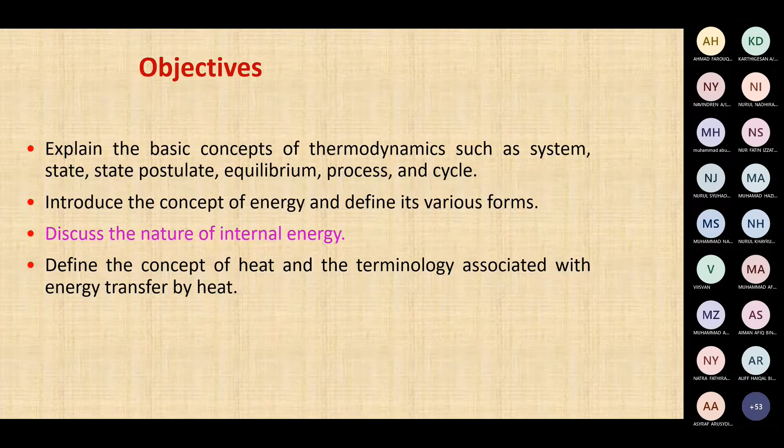The second is to introduce the concept of energy and define its various forms. The third, discuss the nature of internal energy. And the last is define the concept of heat and the terminology associated with energy transfer by heat.

Okay, now we go to thermodynamics and energy. Many terms are related to thermodynamics. I would like to introduce first the thermodynamics itself. Thermodynamics is the science of energy, so energy is the ability to cause change. The name thermodynamics stems from the Greek words therme as heat and dynamis as power.

The conservation of energy principle: during an interaction, energy can change from one form to another, but the total amount of energy remains constant. Energy cannot be created or destroyed. The first law of thermodynamics is an expression of the conservation of energy principle. Actually, the conservation of energy is related to the first law of thermodynamics, because energy cannot be created or destroyed. So the first law states that energy is a thermodynamic property.

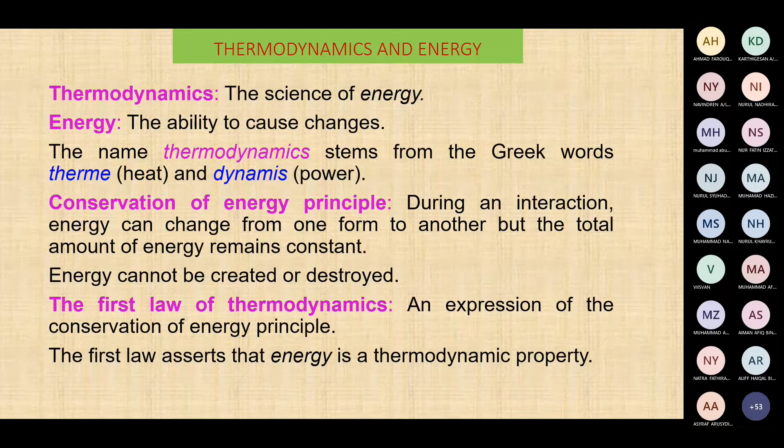Okay, after that we go to the second law of thermodynamics. It asserts that energy has quality as well as quantity. Actually, the second law of thermodynamics relates to efficiency. After we try to utilize some energy in our device, a certain device, then we try to calculate the efficiency. So this second law will relate to the efficiency.

Classical thermodynamics discusses the macroscopic approach. The study of thermodynamics doesn't require knowledge of the behavior of individual particles, so we don't go into the particle itself, just touch on the surface of thermodynamics, such as energy. So we only talk in general.

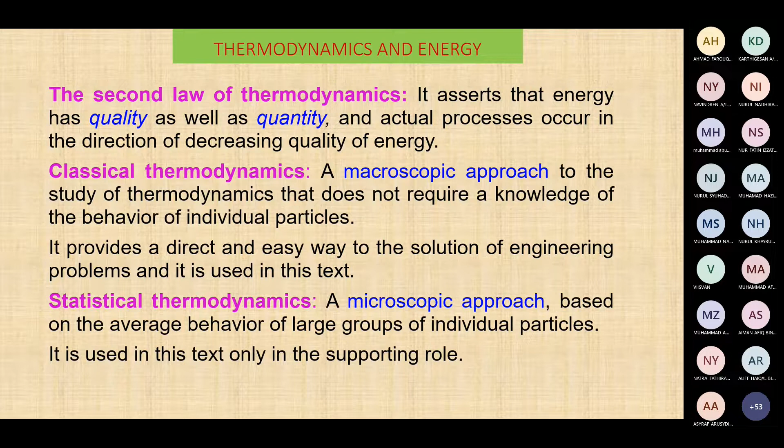When we go into a microscopic approach, it means we are in the statistical thermodynamics system. For example, we try to learn about internal energy. As we know, we have a kind of energy or fuel from the fuel. If you go to a commercial fuel petrol station, we will find RON 95, RON 97, RON 100. It means they bring different internal energy, from 95, 97 to 100. So this kind of energy is related to internal energy. Okay, now, forms of energy.

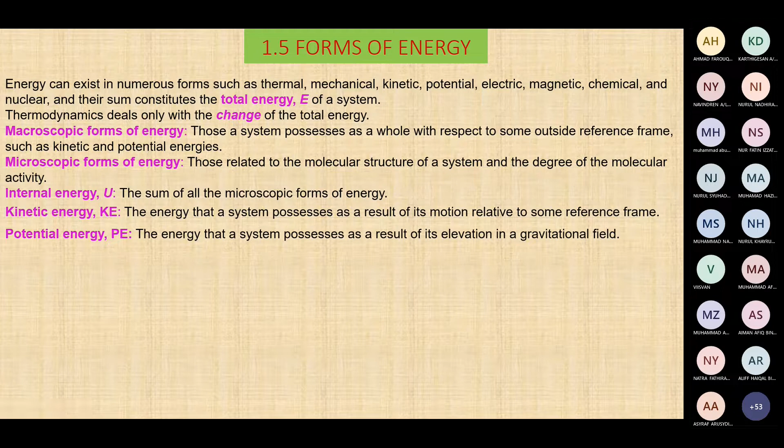We already touched on macroscopic, only on the surface of energy, and also microscopic form of energy. Internal energy is considered microscopic, kinetic energy is macroscopic, and potential energy is also macroscopic. So the total energy is the sum of them: internal energy, kinetic energy, and potential energy.

This sum equation comes from the energy form. So we check first the kinetic energy. Kinetic energy is related to motion, so we should have the velocity of the mass.

When we try to find the unit in energy only, we multiply by the mass. But when we need the energy per unit mass, the mass will be eliminated, so we put on that unit. When we multiply by the mass to the energy, we come to energy only. So both kinetic and potential energy can use this form of equation for energy without including the mass.

This type is for the energy form. When we go to other calculations in the system, piping system, tubing system, duct system, it will be related to the quantity of air, mass flow rate, and so on. Mass flow rate is calculated by m dot, and will be calculated by rho v dot.

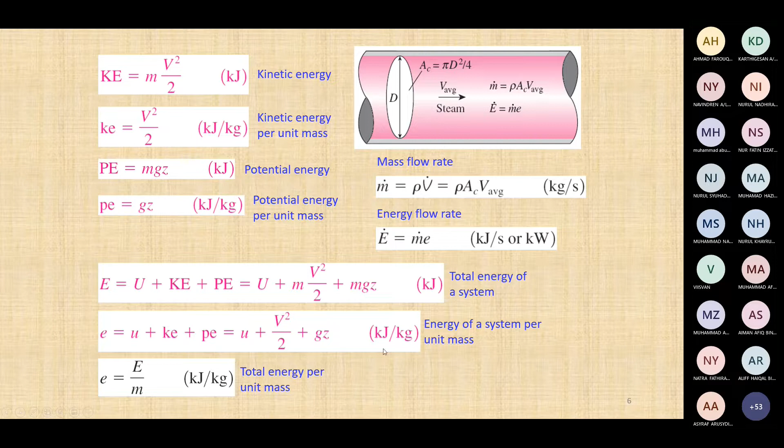This one is another type of energy, per unit mass. We can use small letters, but the unit is energy per mass.

This one is energy balancing. If in one system we try to input energy, the energy out should be similar to the energy in. This is what we call energy balance.

When we're talking about the balancing, E in minus E out is the energy work done in the system.

This one is the mechanism of energy transfer, E in and E out. The total energy may come out as another form of energy. So if we supply mechanical energy, it may come out as thermal energy, not only as kinetic or potential energy, but possibly as thermal energy.

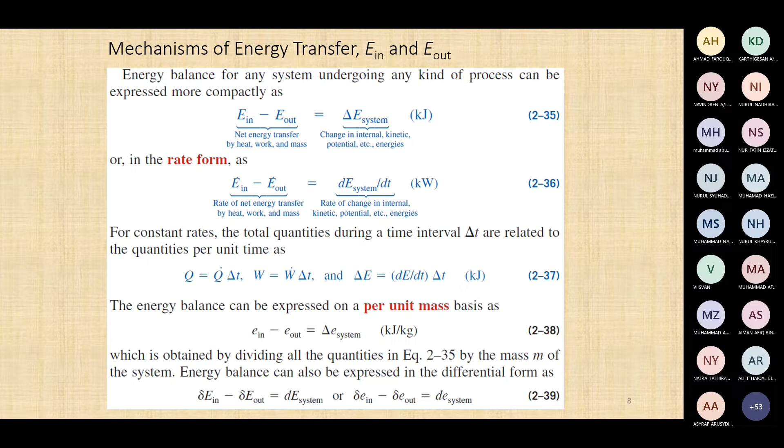This is balancing energy with variants of forms of energy. If we consider the total sum of energy involving thermal, mechanical, and another type of energy, E in and E out, the total is E system. The balancing is E system.

Now we go to another term that will be frequently used in the HVAC system.

This one comes from the thermodynamic system to explain certain conditions. In some cases, we may analyze one building as one system, or one room as one system.

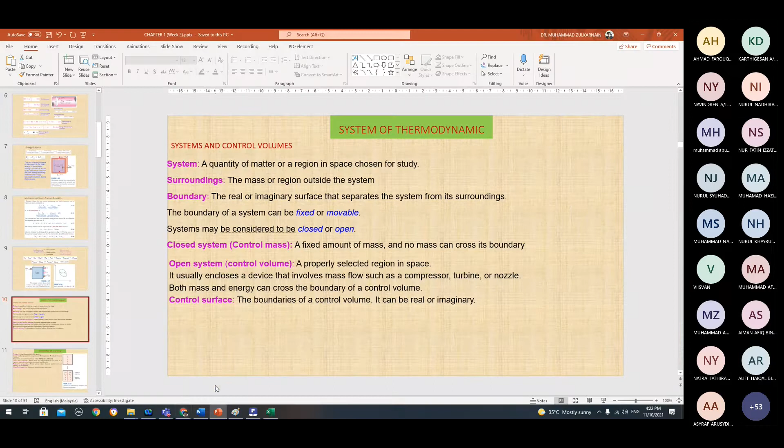This term will be taught under certain conditions. The system is a quantity of matter, a region in space chosen for study. So as I said, we will create one system that can be in the space, like one room or one building, considered as one system.

Outside of the system, we call the surrounding. Whatever is outside, like mass and energy, we call the surrounding. But separating the system and the surrounding, we call the boundary. So we will close with the boundary.

Boundary will be considered fixed or movable, closed or open, depending on the study case. A closed system is a fixed amount of mass and no mass can cross its boundary. So when the system is closed, no mass can cross to the outside surrounding. But open systems can do that, mass can come from the outside surrounding into the system, and vice versa from the system can cross to the surrounding. The control surface, the boundary of the control volume, can be real or imaginary.

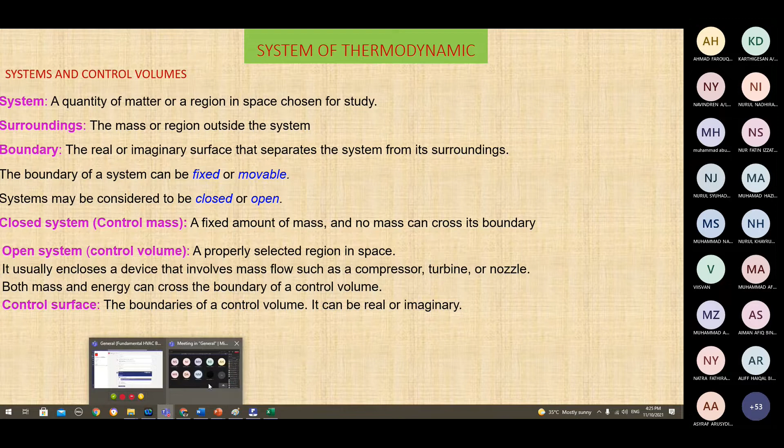But the condition is different. Inside the system, it's already at a certain pressure, temperature, and other properties, but there's no solid boundary.

Okay, we proceed to properties. These properties are familiar to us in the thermodynamic system, with properties like M as mass, V as volume, T as temperature, and so on until density rho. Property itself is any characteristic of a system. Some familiar properties are pressure P, temperature T, volume V, and mass M.

From the list of properties, we can divide them into extensive properties and intensive properties. Extensive properties can expand in size, so we consider mass as extensive, and volume also can expand, but temperature, pressure, and density cannot. We call these intensive, the opposite of extensive.

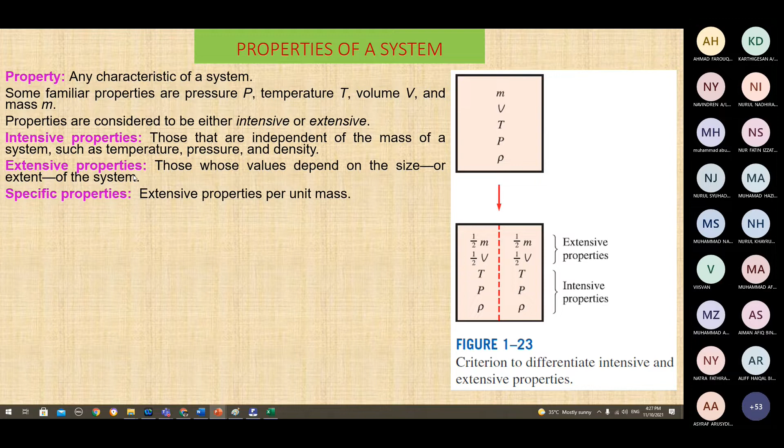This is another condition in the system, and this is fundamental before we go further. So why do we consider the system in equilibrium: thermal equilibrium, mechanical equilibrium, phase equilibrium. Much of this terminology comes from the thermodynamic system. For example, to explain the condition, the state is balanced, it means equilibrium, thermal equilibrium.

So what is thermal equilibrium? The temperature is the same throughout the entire system. So if we make an entire room at a certain temperature condition, it means the temperature at any corner, any position, any space will give the same information in the same temperature.

Phase equilibrium involves two phases, and when the mass of each phase reaches the equilibrium level, it stays there. So phase equilibrium means if we consider it in liquid, it will be consistent in that liquid condition always. And chemical equilibrium means the molecule content will be similar, like water always being H2O, so it means chemical equilibrium is still there.

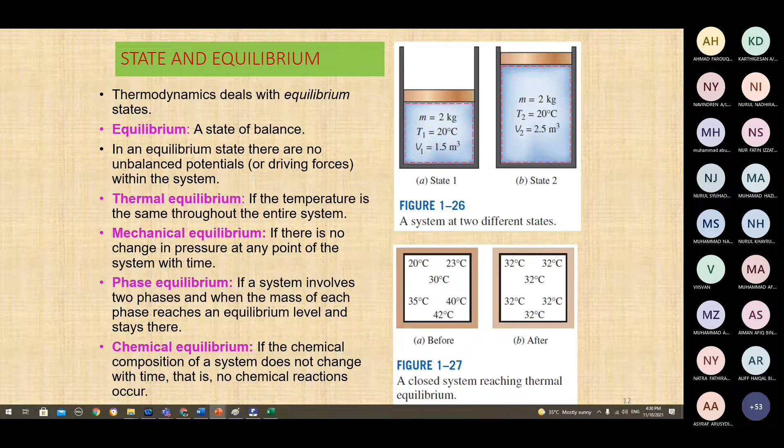If we change it to gas, it means it's no longer H2O, it has already changed, maybe already creating a gas with another kind of molecule.

In the ideal gas, we will touch the equation PV equal MRT. Actually, this form of the equation can be changed, can be accurate with other forms of the equation. V actually will be represented by two conditions. V is not always volume. When we mention V with a capital letter, it means volume, but v in small letter means specific volume. This is different, also different units.

Actually, v for specific volume is per rho. Rho refers to density of the mass. So if we consider small v as per rho, we will change the condition of the equation in the ideal gas. So no more PV equal to MRT, we can rewrite it in another form of the equation like P equal rho RT.

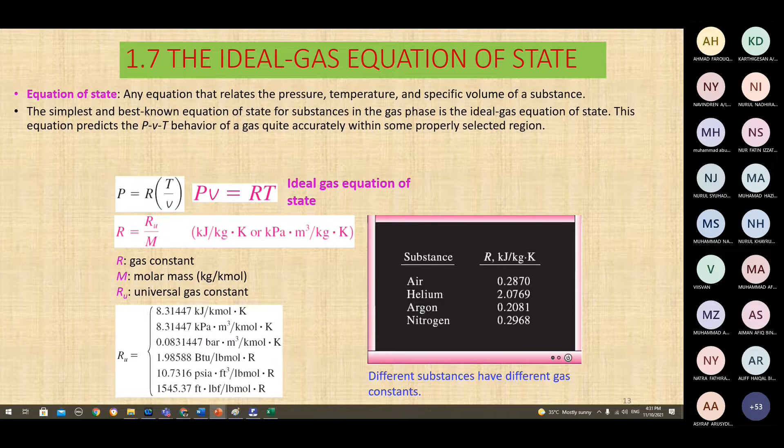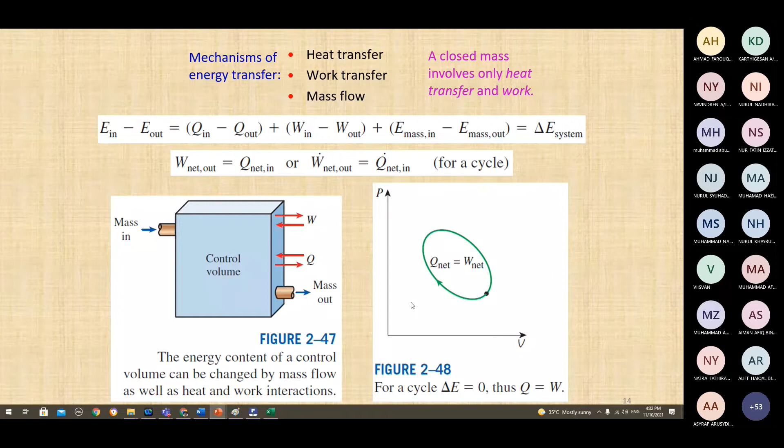Okay, this one is similar condition with the balancing mass. Mass in is equal to mass out. So whatever we supply to the system, for example air supply into the building or room from the AC system, so for the inlet, as the return of air, mass will be similar to the air supply into that room. This is similar to the equilibrium of energy. So the mass also will be similar with whatever supply to the mass, number of quantity of mass in the system will be returned by similar number quantity of the air to return.

Okay, this one is another form from the ideal gas equation, PV equals MRT. Now the mass where we carry it out, come out with M as a mass. So the formula we change like this. So when the system in certain condition, P1V1 over T1 equal to P2V2 per T2. This means M1 and M2, so M1 will be equal M2. Sometimes maybe P1 is lower, but this will be balanced by P2 is higher, but temperature is lower or higher also, and then V2 is maybe different, but the total will be similar to total in condition 1.

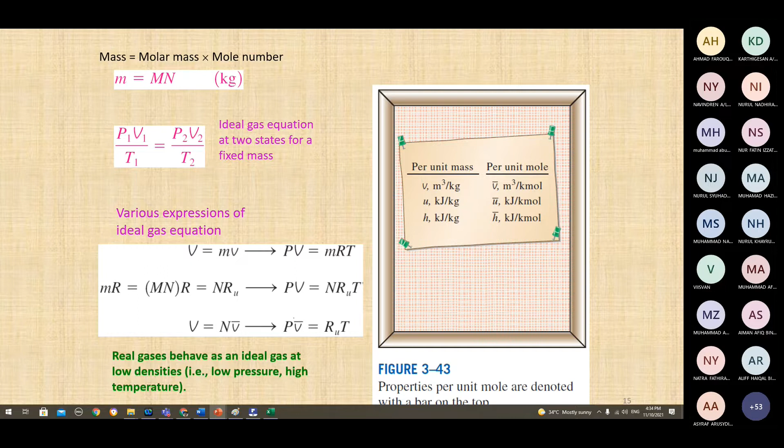Okay, this one is another form of the ideal gas equation. So R mentioned to the gas constant. So if we consider outside air, like the environment air, the air will get a constant number. So we can get this number from the table.

Okay, this one we go to sensible and latent heat. So this will be common use in terms of HVAC system. So we will use latent heat of fusion, latent heat of evaporation. What condition actually is it? So this one is to describe the condition of refrigeration system.

So actually, refrigeration system will change from the phase condition in liquid and then change to gas, vapor, and then what energy to change, the quantity, what quantity of energy needed to change to other phase, from one phase condition to other phase, from liquid to other kind of phase like vapor or gas. So why does this happen? Because we need refrigerant in that condition of phase to supply the kind of energy. So the energy we will supply to the environment, what kind of energy, and then what kind of phase, and then to the indoor room itself, inside of the room, what kind of phase, and how much energy.

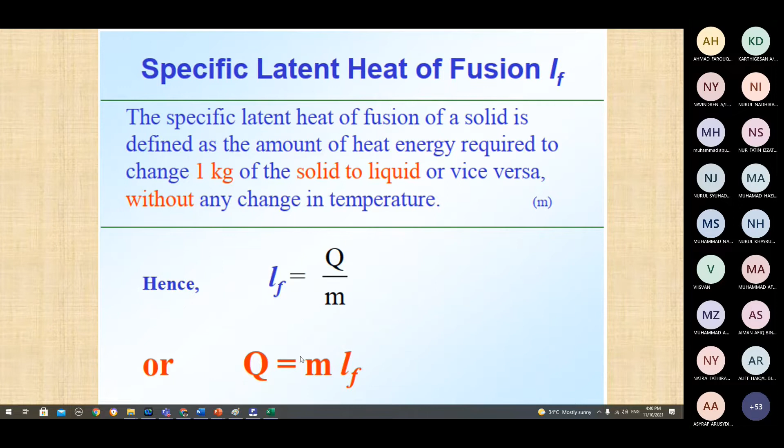The specific latent heat of fusion of solid is defined as the amount of heat energy required to change 1 kilogram from solid to liquid or vice versa without any change in temperature. Hence the formula LF equal to Q/M, or we can rewrite to find Q, which equals M times LF.

This one is the formula for vaporization, latent heat of vaporization, LV. The specific latent heat of vaporization of liquid is defined as the amount of heat energy required to change 1 kilogram of liquid to vapor or vice versa.

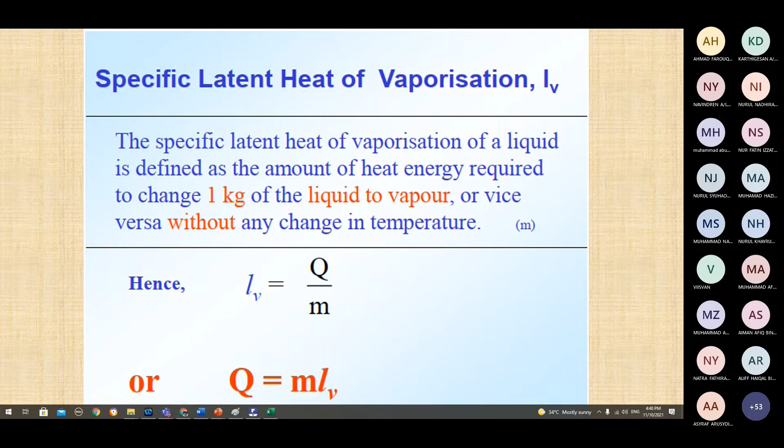Solid to liquid: this is the energy in the water system, from ice to liquid. Energy is needed to move molecules slightly further apart so that the attraction between the molecules is weaker. So what I said just now, we remove the bonding within the molecule, and it becomes water. As we know, in the solid the molecules are bonded to each other in a good arrangement.

So when we weaken the bonding and it becomes liquid, now the molecules can roll and slide after we change the phase. So the molecules now become moving from one molecule to another, with no more bonding to each other.

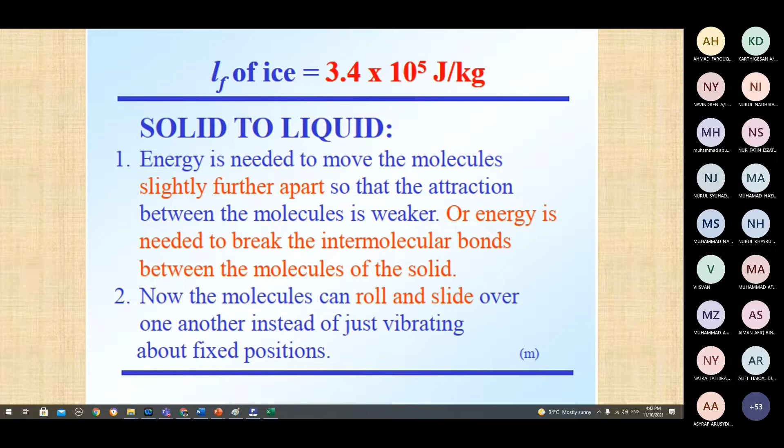Liquid to gas: energy is needed to separate the molecules against the mutual attraction. This is the higher bonding within the molecule, the attraction within them, and we try to separate them. For example, H2O, we try to remove H2O to become H itself and O itself.

This requires a higher amount of energy. This is why LV is larger. Yes, correct.

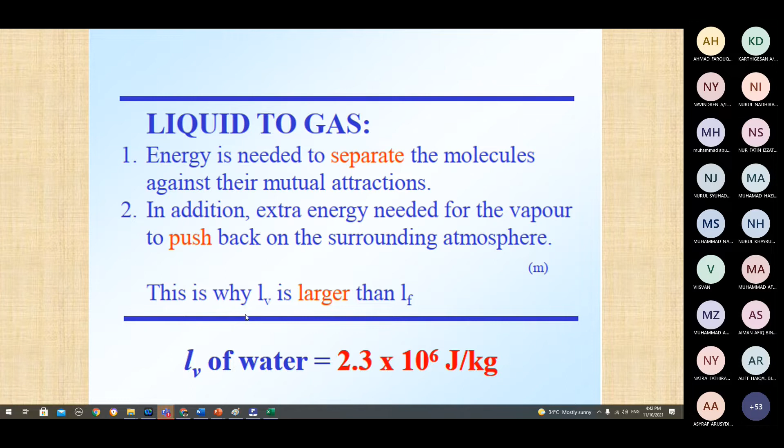Okay, we go to saturation condition. So actually when we plot P as pressure and T as temperature, or we can plot P with the specific volume, we get a diagram like this.

So this left part is actually the saturated liquid of water, and for the right side of the saturated curve, it forms the saturated vapor condition.

Within the region from saturated liquid to saturated vapor, there will be a mixed condition, depending on the mixture condition. Sometimes when we go close to the saturated liquid line here, maybe the liquid portion is dominated. When we go to the other side, close to here, the mixture condition is dominated by vapor condition.

Maybe 50% is exactly symmetric between the saturated liquid line and the saturated vapor line, so it will be around here, giving 50% condition of mixture.

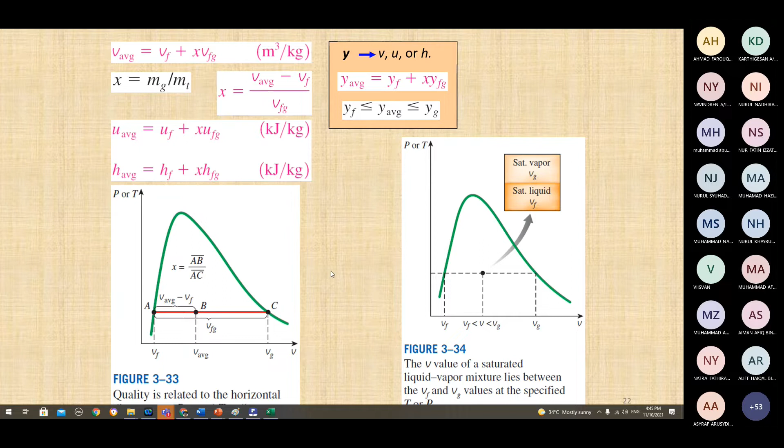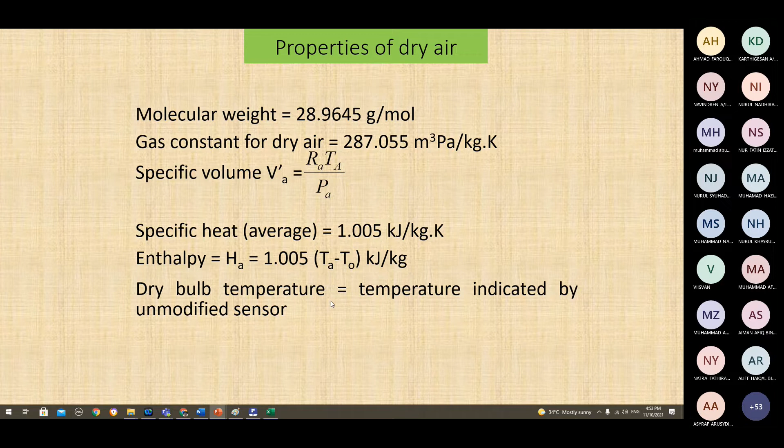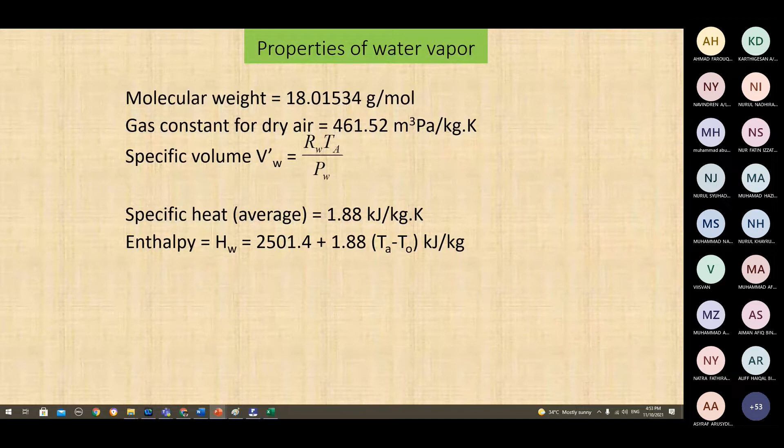And then this condition of properties when the condition is water in vapor. And then this equation for air and vapor mixture condition, we can use Gibbs-Dalton law. So the total is air, dry air with the wet air, or mixed condition.

And then we go to the condition of dew point temperature. As we know, we try to condition the air with HVAC system devices. So anything will be related to air and water condition, because air is related to water condition. And sometimes we also use refrigerant in some HVAC devices with water, not only refrigerant of the chemical kind. So that's why we try to create more understanding of the water and air system.

So the dew point temperature is when the water vapor in the air becomes saturated. When air is at the temperature equal to the saturation temperature corresponding to the partial pressure exerted by water vapor, this temperature is called dew point temperature. So at the dew point condition, the saturation pressure is mentioned in that area of condition, pressure saturated with the content of water. When it touches a solid medium, it becomes condensation.

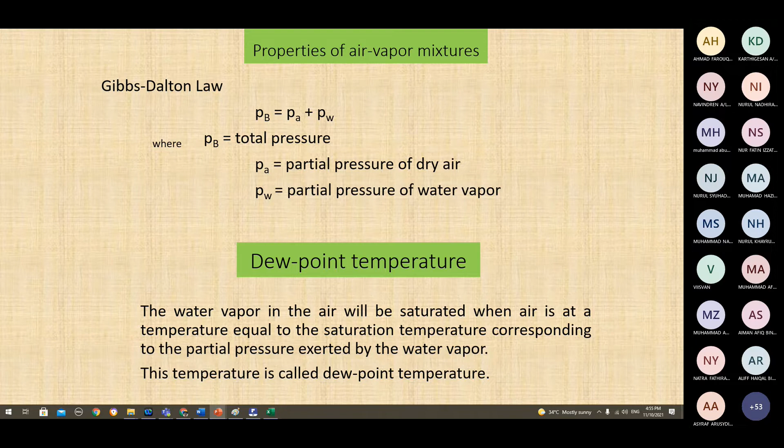Humidity ratio. This condition describes the condition of the space. That's why we try to learn what the condition is right now, and what condition we try to achieve, in terms of temperature, pressure, and moisturization system. So we try to measure certain conditions of the space related to the air and water condition system, because it relates to the controlling system of the space.

So humidity ratio is the ratio of weight of the moisture to the weight of the dry air in the air-vapor mixture. We try to describe the condition of the space: how about the condition in this space, how about condition in our room, how about the condition right now we want to control. So we will measure certain parameters - sometimes with humidity ratio, sometimes with temperature, sometimes with relative humidity. So we use this relationship to control the room.

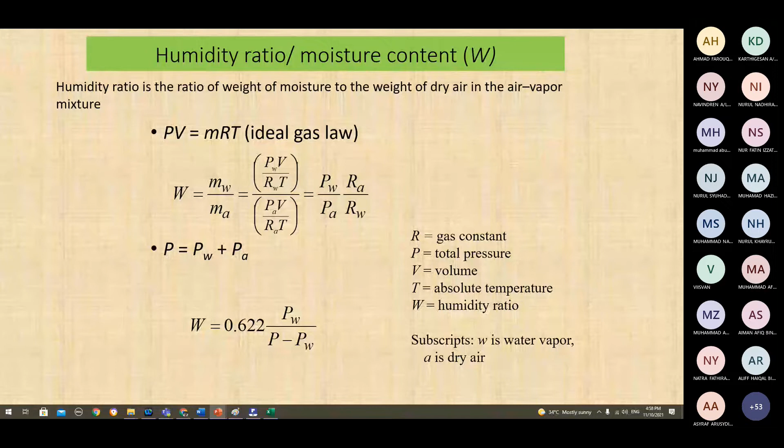So this one we can use the final formula for humidity ratio. This one is the relative humidity equation.

Relative humidity is the humidity ratio of the air expressed as a percent of the total saturation point for that specific temperature. So relative humidity is also used to measure this parameter, to measure conditions related to human comfort.

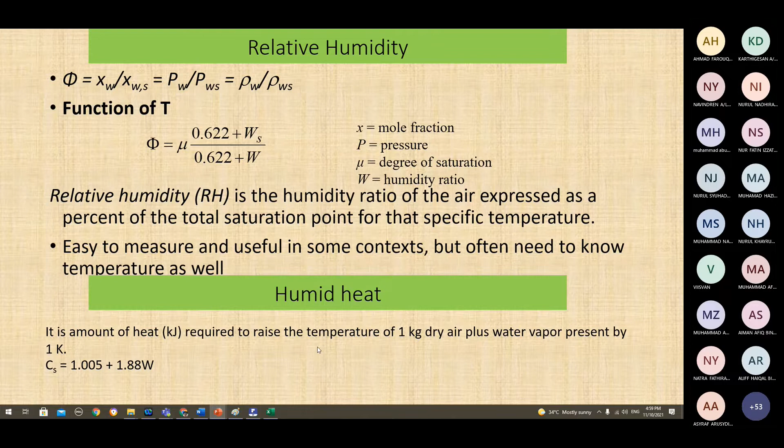This one is the formula. Humid heat is the amount of heat required to raise the temperature of 1 kilogram of dry air plus water vapor present by 1 K. Specific volume of the dry air plus water vapor in the air.

So sometimes we also measure, in a certain condition of the air, the specific volume. Maybe later on I will show how it relates to the condition of the air by using a graphic.

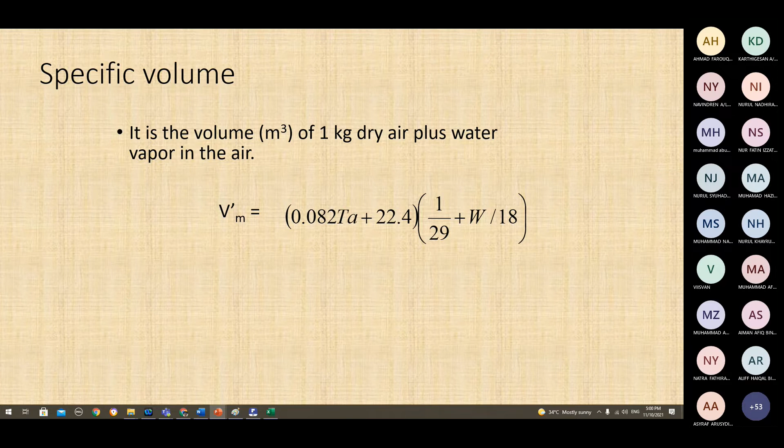We try to understand first the terms that we measure to condition a certain condition of the room, of the space. So we also measure the wet bulb temperature.

Actually, the wet bulb is commonly used in room temperature measurement. The wet bulb temperature is the temperature read by the thermometer covered in a wet sock cloth, the wet bulb thermometer, over which air is passed.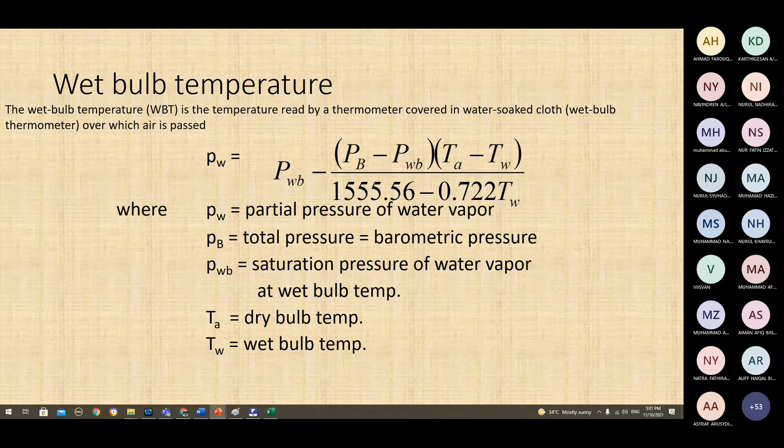Now, actually, all of the parameters that we are measuring refer to one graph. This graph, we call what? Psychrometric chart. Psychrometric chart.

So we find dew point temperature, humidity ratio, humid volume, and relative humidity of air having a dry bulb temperature. So we have input from the space: temperature 40 degrees Celsius and wet bulb temperature 30 degrees Celsius. So when we measure the room, we go to the psychrometric chart.

So we come out with several pieces of information from here. Certainly this is very sensitive, because we check with the eye only, so the skill comes from the eye. So if you make a mistake with your eyes, you will get an inaccurate result for a certain condition parameter measurement.

For example, this one with the curving line is RH, relative humidity. And then you can see here, horizontal line, mentioning the humidity ratio here.

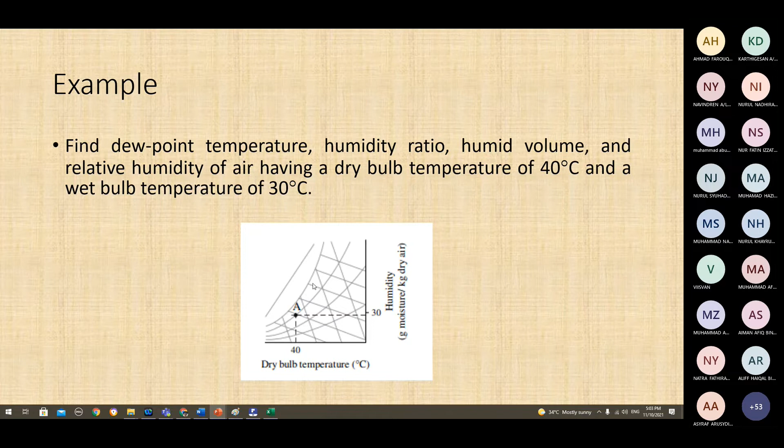Like this is RH, relative humidity, with curving, and then anything will give information. So we can check here, in the 30. This one is the temperature.

This number is not mentioned, but we can get the temperature for dry bulb. Okay, we can see here, but...

This one, humidity, moisture, is kilogram per kilogram. If you change it to grams, you get a bigger number. We try to get it in grams. This one is in kilograms.

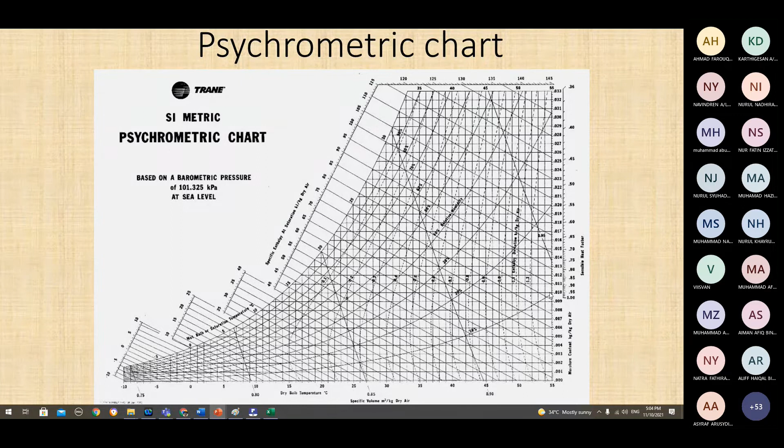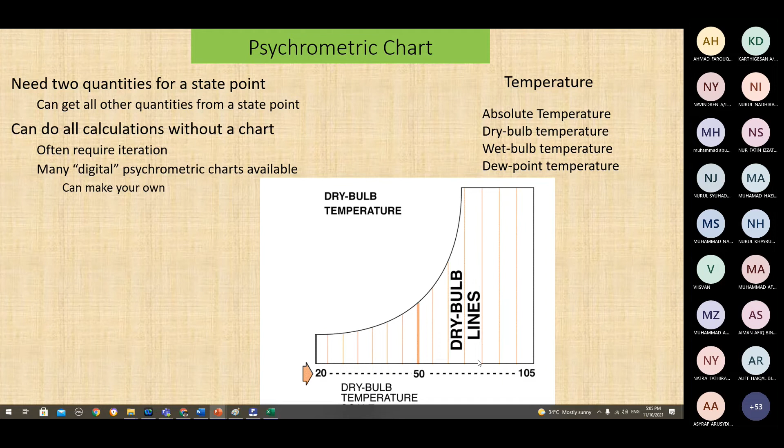Okay, this is just to introduce how to use the psychrometric charts. So we will come out with the dry bulb as a vertical line, and also wet bulb at a certain angle, maybe 45 degrees or something, and the relative humidity with curving, and dew point here.

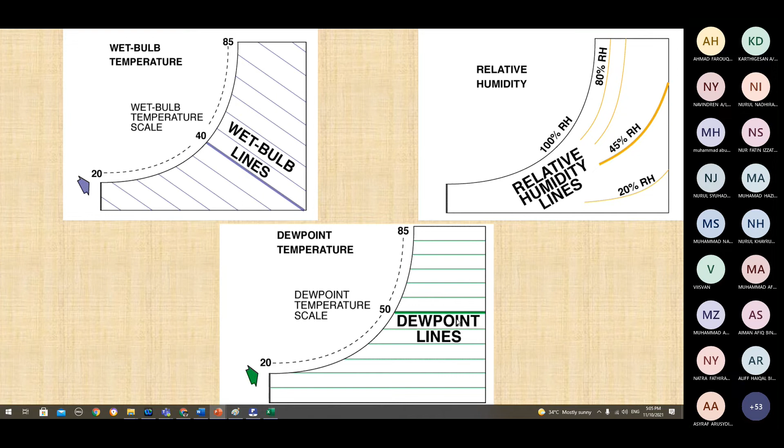Okay, humidity ratio W just now for comparison, so we can check. Specific enthalpy - actually this one is outside of the graph that I mentioned before. Enthalpy also has a line here.

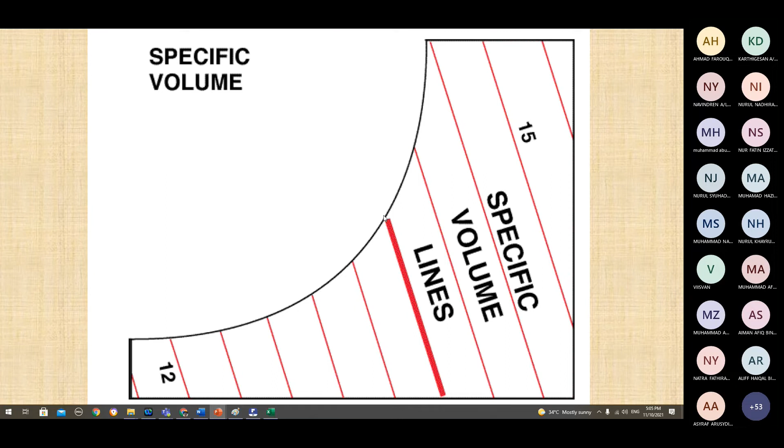We mentioned the data, and this one is specific volume. So from one chart only, we can get any information.

So be careful with the psychrometric charts. Make sure the chart is appropriate for your environment. Figure out what two quantities you know. So if you try to meet two lines, make sure we have two parameters given as information, two quantities.

Then understand the slope on the chart, find the intersection. The intersection is very hard to find because sometimes we meet at an intersection, but sometimes we try to get it from calculation because the line is not mentioned in the chart.

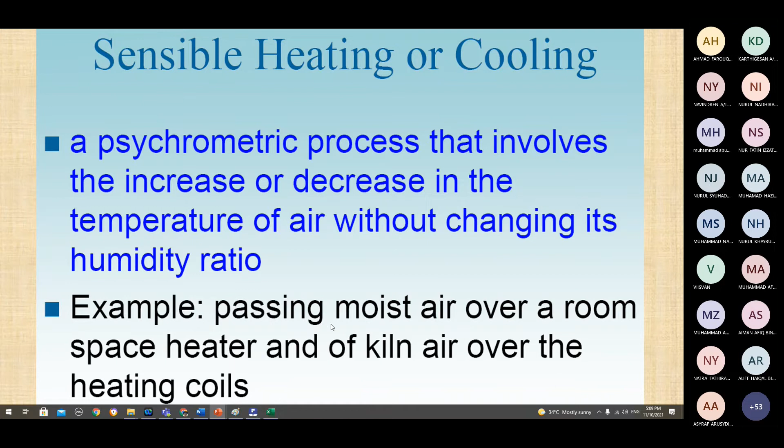So when we can go to kiln, when the output air passes to the duct, we can measure that part. This one you can measure the condition in the duct system, what happened and how much, the quantity, all information. So sometimes we can control this.

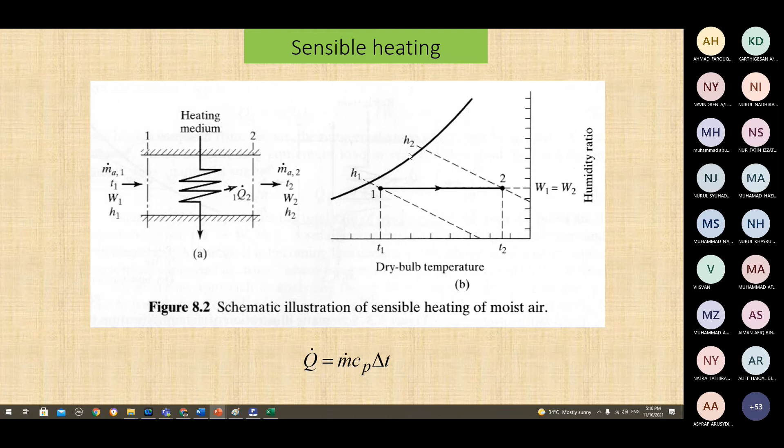This one is moisturization, humidity ratio. We can control it by increasing the temperature of the dry bulb, so we can maintain the humidity ratio. So not only increase the temperature, but also we can maintain it, so that's why we try to make the condition in range, in range of human comfort. Maybe at point two, enthalpy already increased, but the humidity ratio is still there.

Okay, now one example. If we try to control the room with T2 at 60 degrees Celsius, and then the humidity ratio, and the relative humidity 58.8%. So T3 is 70 degrees. And how about the humidity ratio and relative humidity? So you can go to the psychrometric chart.

So we come out with the unknown parameters: PW3, humidity ratio 3, and relative humidity 3. So from 50 to 70. The first answer is 7... this one is 70 to 55, 55 degrees Celsius, so this one is 55... 51, sorry, 51 degrees. Okay, then RH becomes 70... 37.6%. So that's how we measure the condition with temperature change.

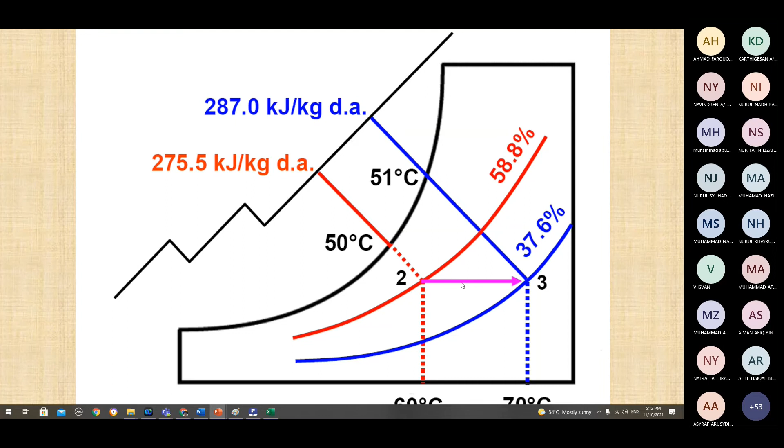Heating and humidifying is a psychrometric process that involves the simultaneous increase in both the dry bulb temperature and humidity ratio of the air. So if we increase a certain condition, we simultaneously increase the temperature and humidity ratio.

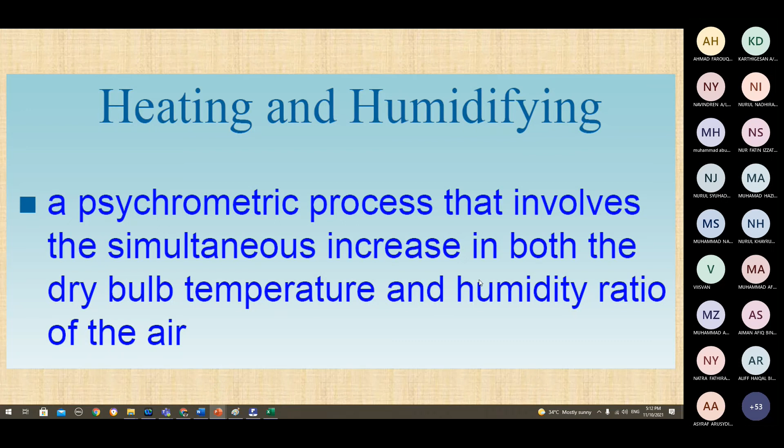Okay, then we go to the last example before I close the class here. 2.5 cubic meters of lumber is being dried at 60 degrees Celsius dry bulb temperature, 52 degrees wet bulb temperature. The drying rate of the lumber is 12.5 kg of water per hour. If outside air is 27 degrees dry bulb temperature and 80% relative humidity, how much outside air is needed per minute to carry away the moisture?

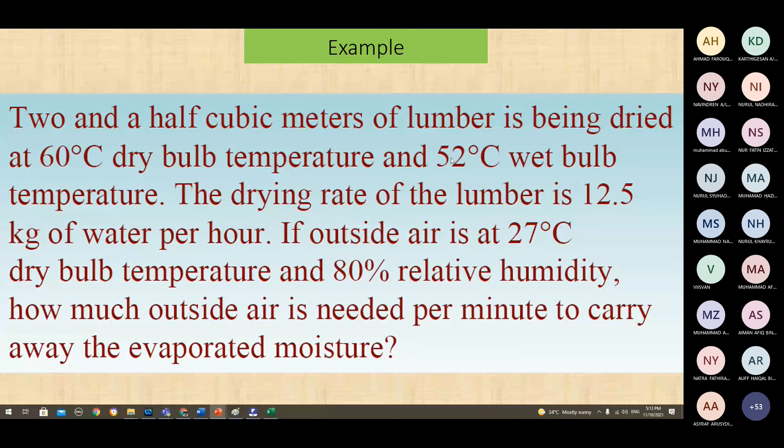Okay, this one the answer is the position in psychrometric charts. So actually we will learn the psychrometric charts in depth practically in the lab. This one is related to lab 4. If I'm not mistaken, we will learn it indeed in lab 4.

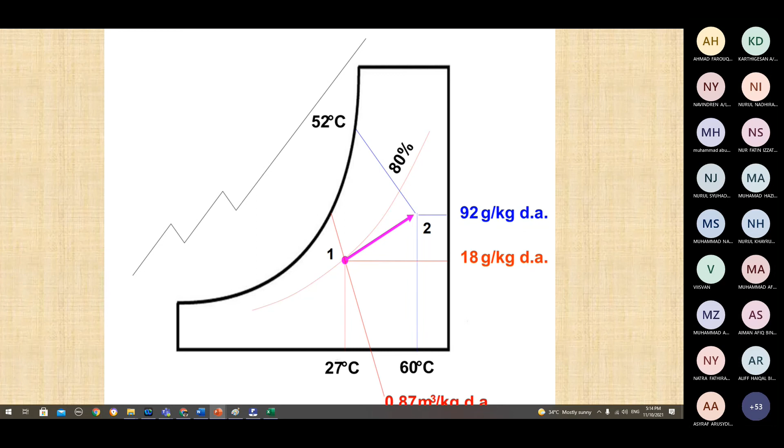Okay, and then we can measure the difference between the first condition and second condition, or the air flow rate condition. And then this is the H condition of point 1 and point 2.